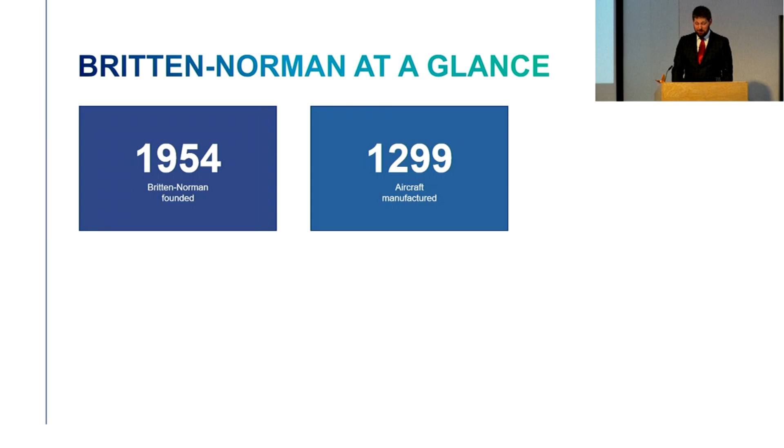But Britten-Norman - do you know Britten-Norman? Well, we've been around since 1954 in various guises. It was founded by Messrs. Britten and Norman, and although I haven't spotted him this evening, we do actually have a Norman, Ash Norman, in the company. There he is, I'm embarrassing him. So the family name is still involved in the company, and we're proud of that fact. The total number of aircraft we believe to be over 1,000, which compares favourably with some very popular, famous, larger Airbus family aircraft - some of them are of that order of magnitude numbers as well. So a real British success story. We're currently at 110 employees in skilled roles, but the company is also expanding, so that number will go up very shortly.

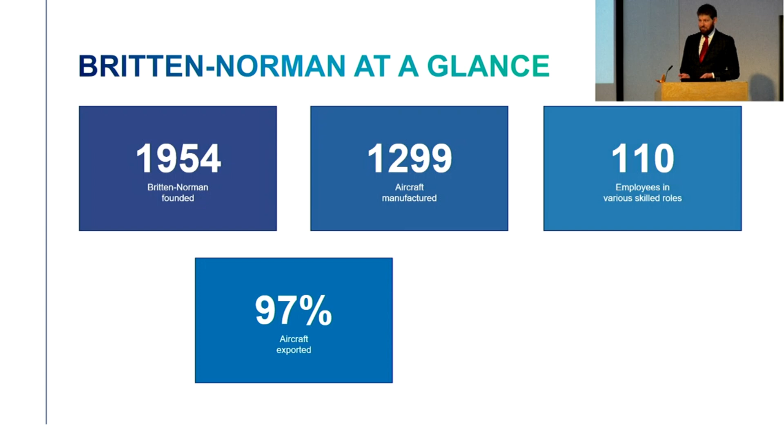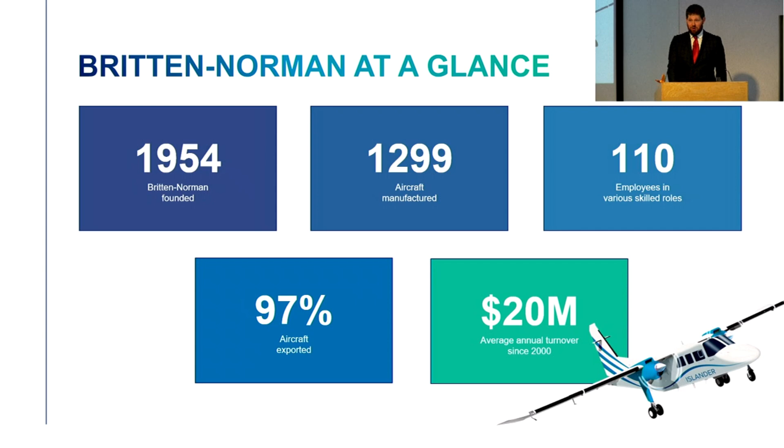Unusually for British industry, we build things in the UK and export them to the world. 97% historically of all aircraft that we've built have been exported, and annual turnover of about 20 million US, which puts us very firmly in small, medium enterprise, SME territory.

I won't go into huge detail of all of these things, but just to show you that for that quite small number of people I mentioned on the previous slide, we do a heck of a lot. So we are a CAA Part 21J design organisation, the type certificate holder of the aircraft. We maintain and sustain that, as well as working on product improvements, R&D, and specialised mission projects, which is the flavour of what I'm going to talk about shortly.

We build stuff too. Our facility at Bembridge on the Isle of Wight is the spiritual home of Britten-Norman and is still a modern functioning production facility where production is ramping up currently. I've got some pictures later on of aircraft on the production line in Bembridge. That is really quite exciting and unusual, actually, from my point of view as a graduate of an aerospace engineering program, having worked on large US-based projects such as Chinook or larger multinational programs like Merlin. Suddenly moving to a world where all the bits of metal go into that building in Bembridge and aeroplanes come out the other end - absolutely fantastic and really unusual in 2025.

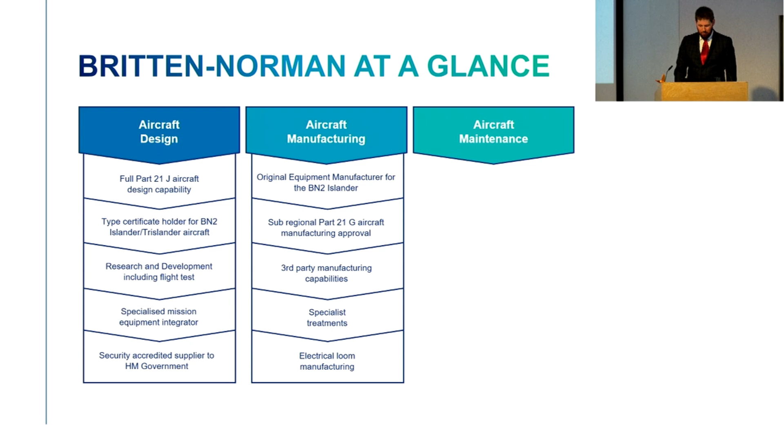We're also a maintenance, repair and overhaul organisation, the MRO, which is Part 145. So another main business line aside from building new aircraft is refurbishing old aircraft that are sourced worldwide. Now obviously lots of people will claim to refurbish an aircraft for you, but when Britten-Norman does it, we really do it. These aircraft are stripped down, nuts and bolts out, and really rebuilt from the ground up, and they come out looking brand new, even for a really very old aircraft.

And finally, we provide what would be called wraparound services - aviation services, so training, continuing airworthiness management, and other services as well.

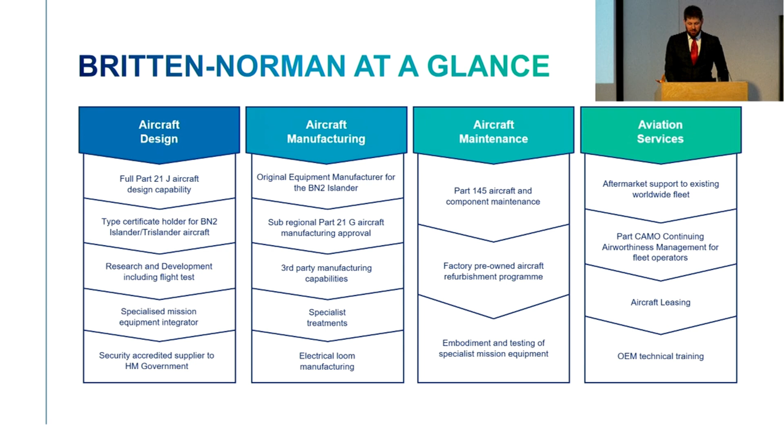So the aircraft itself - some key features here. It's quite often likened to a flying Land Rover, but we are talking a Series 1 Land Rover in some respects, rather than a nice modern Discovery. But those features are really why it's endured so well. It's very simple to construct and maintain in the field. When we compare to our modern, for example, Italian competitors, I ask people to look at the undercarriage. You'll see, as we do some actual photos later in the presentation, the undercarriage on the Islander does not mess about. It is two huge great tyres on a huge great tube that's bolted into the wing spar in a straight line. If you look at competitor aircraft, nice sleek Italian design, nice sleek Italian wheel - try landing that on a ploughed field or a beach with a little bit of a crosswind component. That sort of design philosophy is repeated throughout the construction of the aircraft, and that's why people love them and operate them to this day.

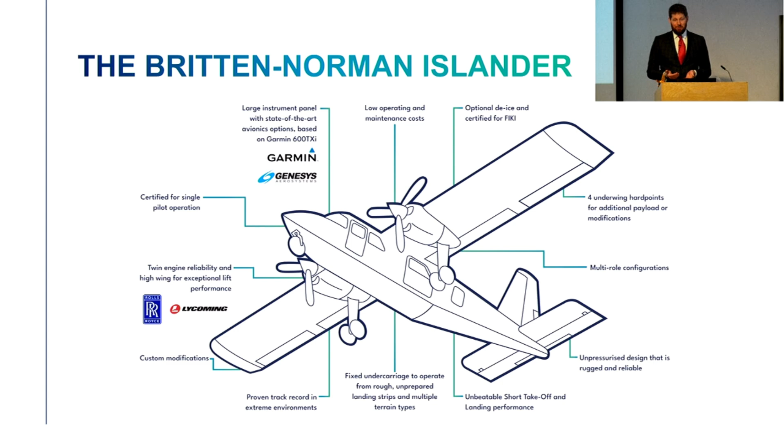Some additional flavours, and I won't dwell too long on this, but fundamentally there are two Islander airframes, and these are all the current production models. There are history lessons to be had about all the hundreds of different permutations over the past 50-odd years. We have the smaller Islander airframe, which comes in two flavours of Lycoming piston engine and a Rolls-Royce turbine engine, and then the larger BN2T-4S aircraft, which has a stretch fuselage, larger wing, much heavier, much more capable, larger turbine engines.

I say larger - when you look at these engines removed from the aircraft, fascinating bit of kit. It's about this size, and it produces 400 horsepower. Absolutely incredible. The first time I saw one, I thought it was a scale model that somebody put out for demonstration purposes. That's why when we look to the future with zero emissions aviation and other cleaner solutions, it's really difficult to beat a turbine on pure numbers, pure power to weight ratio. Fantastic bits of kit.

The typical mission of an islander tends to fall into two main categories. They tend to be commuter, so cram as much stuff in as you can and fly short hops, round robin around a group of islands, for example. That's the service operated in the Highlands and Islands in the UK and also in places like the Falkland Islands. So, a lifeblood, essential taxi service between remote communities.

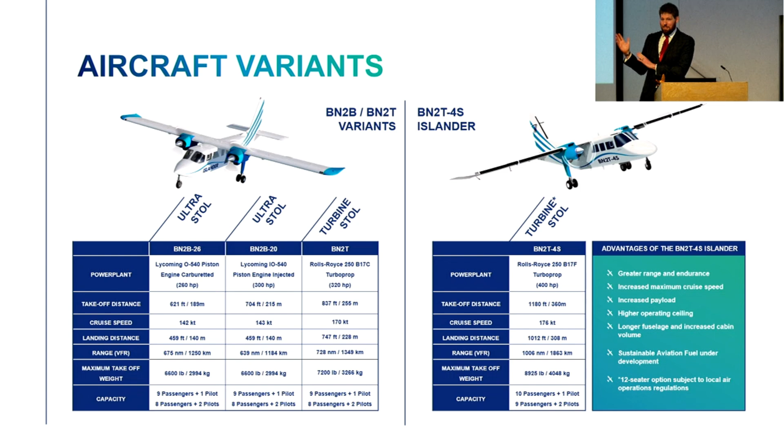The second mission is really quite different, and it's interesting that one airframe can achieve them both: an airborne survey, airborne surveillance, special missions type role, where instead of passengers and cargo, you're taking role equipment - sensors, systems, operators, that sort of thing. The reason the aircraft's good at that is because it can fly very slowly, and quite often it's hard to fly slowly in a fixed-wing airplane, and we do it very well. So a lot of those systems and sensors like flying slowly.

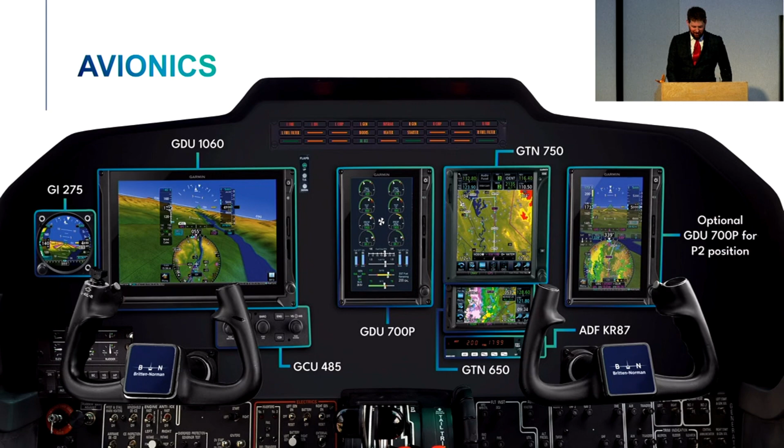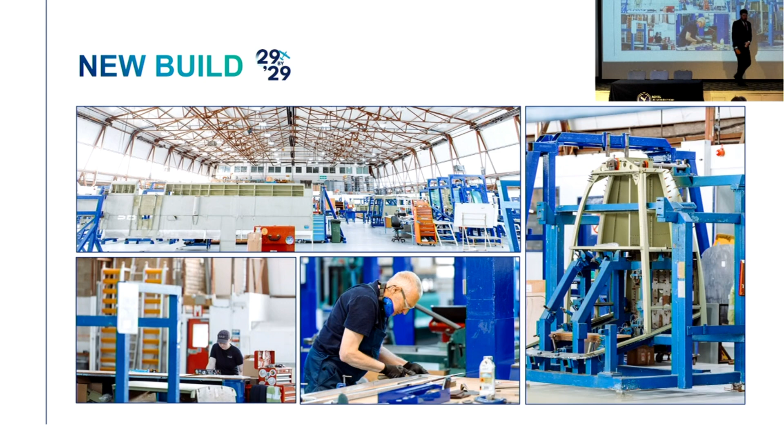29 by 29, the little logo up there - the grand plan is to build 29 new Islanders in Bembridge by 2029. It's a challenge because that production has recently been reshored, repatriated from Eastern Europe, where the aircraft were built for a very long time. So bringing them back to the UK and making it a genuine UK product end-to-end is very challenging. But the will is there, the resources are there, and as you can see, these are photos taken recently. There's the nose assembly of an Islander being put together in the jigs. There's also the tail assembly here. There's a fuselage, and there's some control flying surfaces in the background. So all the bits are coming together, and it will happen.

Project overview - so that was the BN bit. It's now my pleasure to move on to the main event, which is talking about this program that we flight tested last year. So the problem - it's always good to start with an exam question that you're trying to solve with special projects like this.

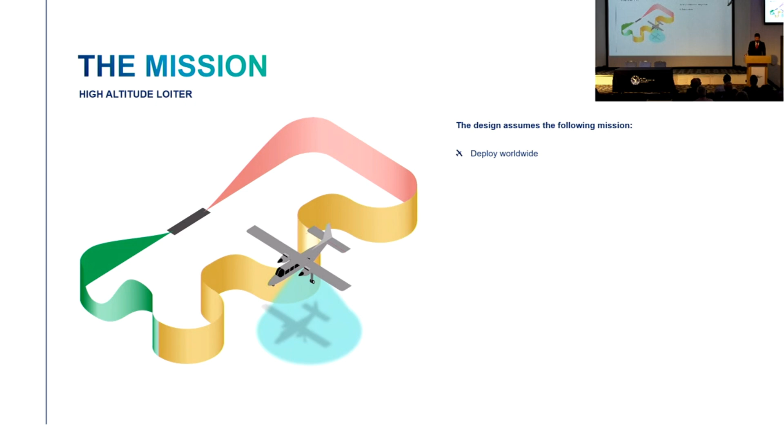So the ability to deploy worldwide at short notice and ferry that to wherever it's needed, to install the equipment in the field, so potentially somewhere quite remote. The actual mission itself: take off, climb to a high altitude, stay there for a very long time, as long as possible, flying slowly. And 8 hours was what we were aiming for.

I've put pseudo-geostationary there. Essentially what the telecoms people would like us to do is be a pole and not move at all. There's lots of different clever ways of achieving that, different racetrack patterns, different cruise climb options. So we talked through a lot of those and we'll develop that with the product in the future.

When running on vapor, fuel-wise, plus a little bit of reserve, descend and land, with a quick turnaround, quick crew change, and repeat.

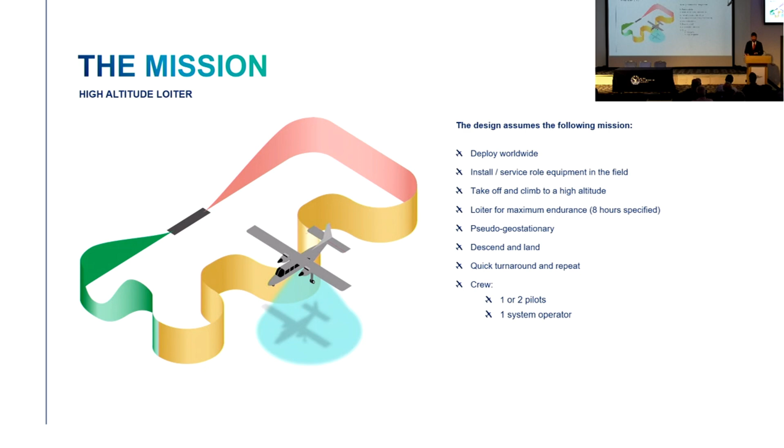Bear in mind that could be a single or dual pilot operation, so potentially single pilot up there for 8 hours, flying slowly in circles, mildly unpleasant. So longer term, potentially an autonomy solution built into it as well, with initially the capability for a systems operator in the back. The reason this is important at this stage of the design is it tells us how many seats you need to have in the aircraft and what interfaces you need to have from each of those seats.

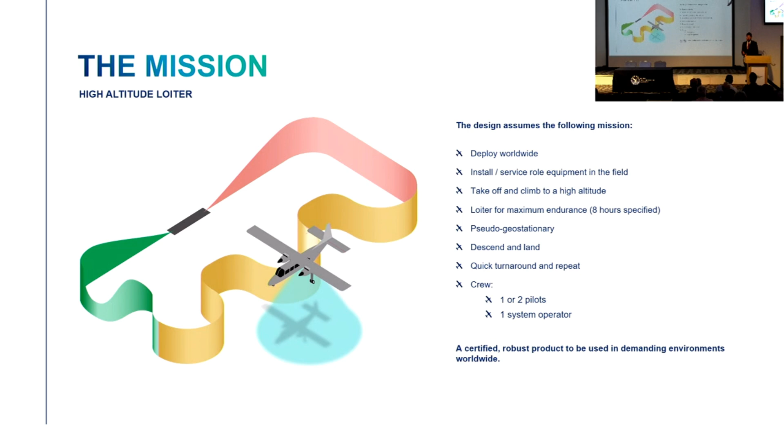And crucially, not a science project, not a one-off flight test article, something that can be flown all over the world, deployed and work day in, day out. So that's what we're aiming for.

The certification strategy for that, and this is Mark Ship's world, our technical director, is to break down the big objective, the big design solution into manageable chunks. So the one that we're mainly talking about today is change number 1.

I've hidden the titles for commercial reasons, but this is what's called a supplemental type certificate. That's just the way it gets approved. And that is a major modification as classified by the UK CAA, to account for the aerodynamic effect of the great big thing stuck on the bottom of the aircraft.

The other 2 changes install the equipment, so actually do the physical installation of that bulge, and the internals that deal with the telecom side of it inside the aircraft. So they were split out into 3 things. The main reason being the major one has a lot more engagement from the regulator because it's a more serious change. That's why they were split out.

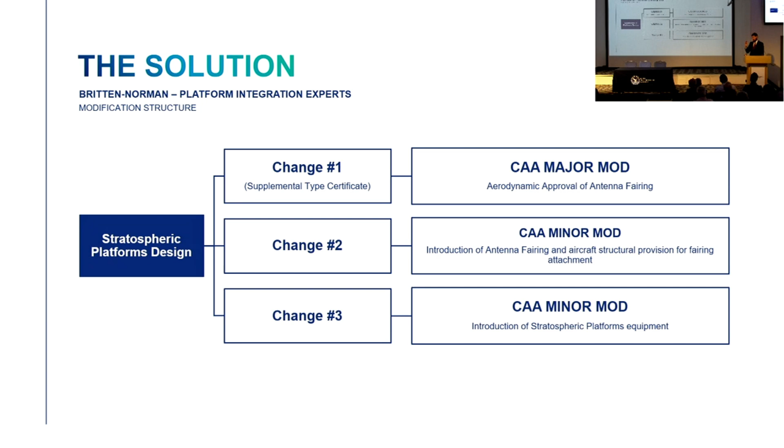So it's not a one-off, quick duct tape it on to the bottom of the aircraft and go flying, although we did look at that, it just wouldn't work. This is a formal engineering solution that's been engineered properly.

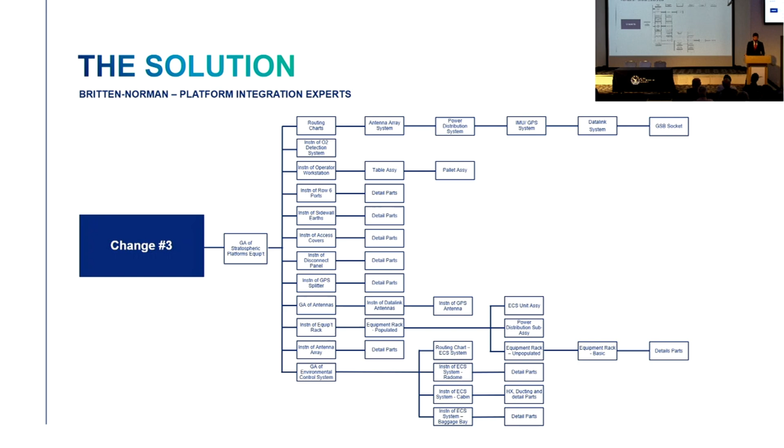Have I got a pointer?

In terms of the shape, we started with the most simple volume that interfaced nicely with existing infrastructure on the aircraft and covered the expansion to the bigger antenna array that was envisaged. We did some subsequent aerodynamic analysis and basically concluded there wasn't much point in making it look pretty. You might see other aircraft, like the Beechcraft King Air, with a more rounded, sophisticated structure underneath, mainly due to the higher speeds involved. With such a low speed aircraft, it didn't really need to be that pretty aerodynamically. At least that was the thinking.

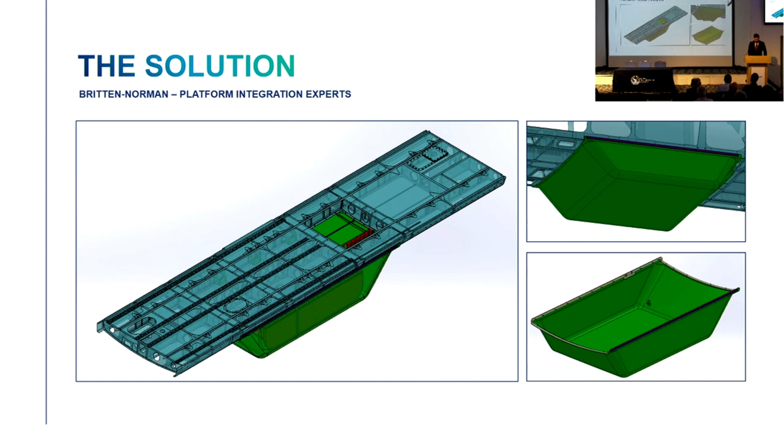Just to give you a flavour of the sort of analysis that happens: structural analysis was done, looking at it across the range of speeds and altitudes, and that's a visualisation of it bowing and deflecting with the change in speed. That essentially proved that an attachment solution was built to keep the thing structurally attached to the aircraft well beyond its highest ever operating speed at sea level, the worst case scenario.

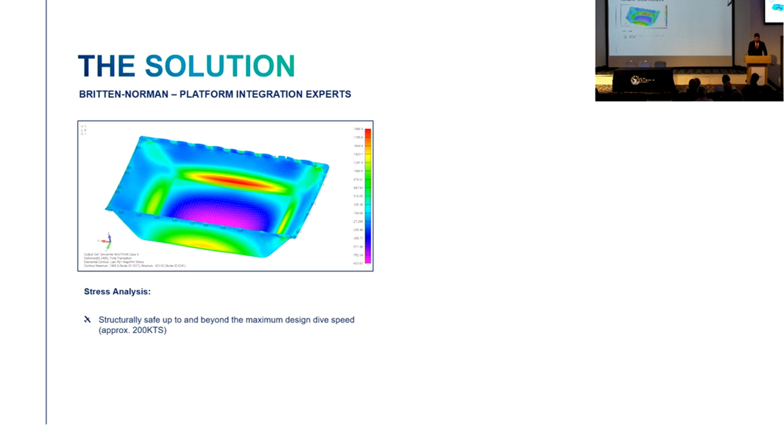We also did some aerodynamic analysis, using a bit of software called Star CCM that looked at the aerodynamics — sort of a virtual wind tunnel, computational fluid dynamics. The things we were looking at were primarily drag, the effect of drag of this large lump on the bottom of the aircraft. You can see it just behind the nose gear there, the wake modelled.

That predicted for us our reduction in OEI climb — one engine inoperative climb performance — of 40 foot per minute. And that's the really critical thing performance-wise on an Islander: what happens when you lose one engine and whether it can keep climbing. So that's the main thing we focused on. Try and remember that number, 40 foot per minute, as we go through.

The other fun thing was the predicted effect on stall speed. Typically, if you introduce a draggy item to an aircraft, you'd expect that to have a detrimental effect on the stall speed, the slowest speed at which the aircraft can fly without falling out of the air. The modelling was actually telling us it would improve the stall speed by 1 knot.

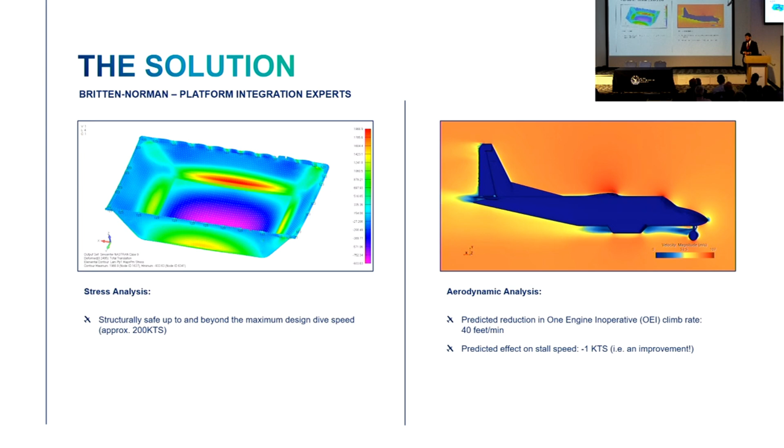Various interesting reasons why that could be true. We thought we'd just follow it through to the flight test program and see.

There's a saying in the design office that if Garnet's looking at drawings, then it's all gone wrong. So I won't linger on this too long because I'm absolutely not a mechanical engineer.

But each of those boxes I flashed up earlier resulted in some very clever detailed design work. I believe this is part of the attachment solution for the bathtub. So yeah, lots of drawings that are initially done in CAD, 3D computer-aided design environments, and are then exported to traditional engineering drawings for production and installation.

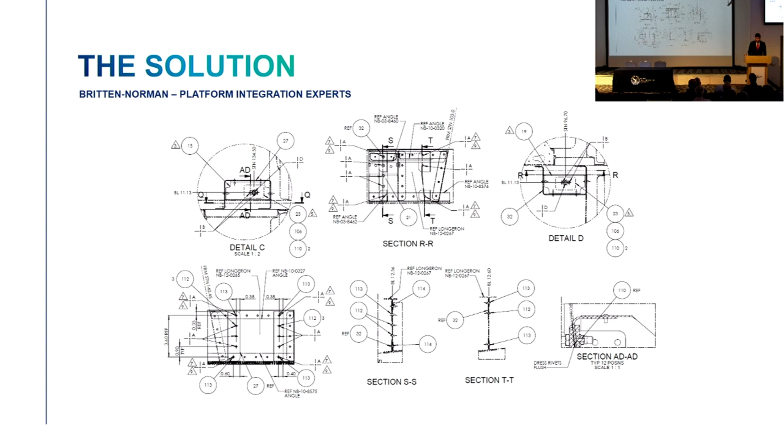And eventually, this is what arrived — well, rather, an unfinished product arrived, and then we applied the finish to it. This is the great big bathtub, the aerodynamic fairing at Lee-on-Solent, ready to be installed. Another interesting fact about it was it was the only one in existence, so we really could not break it as part of this program under tight timescales.

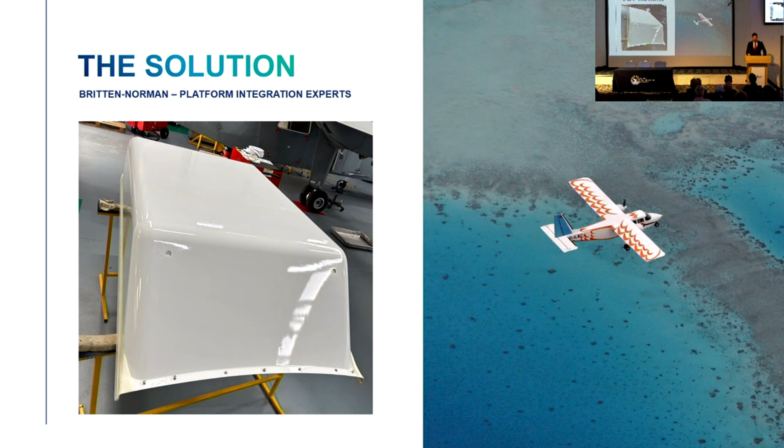This is always good fun.

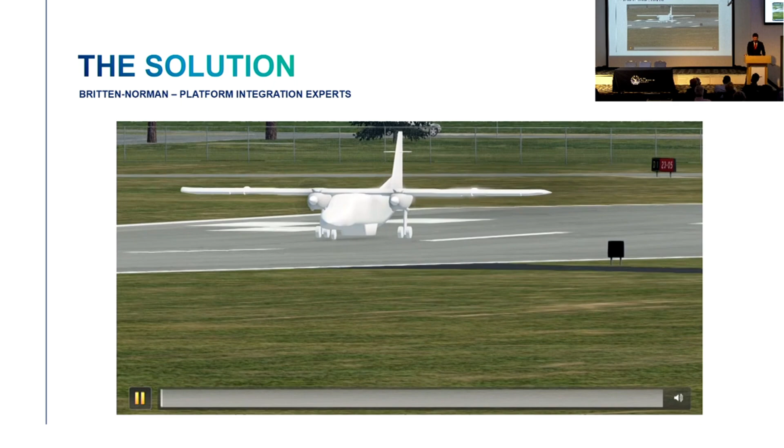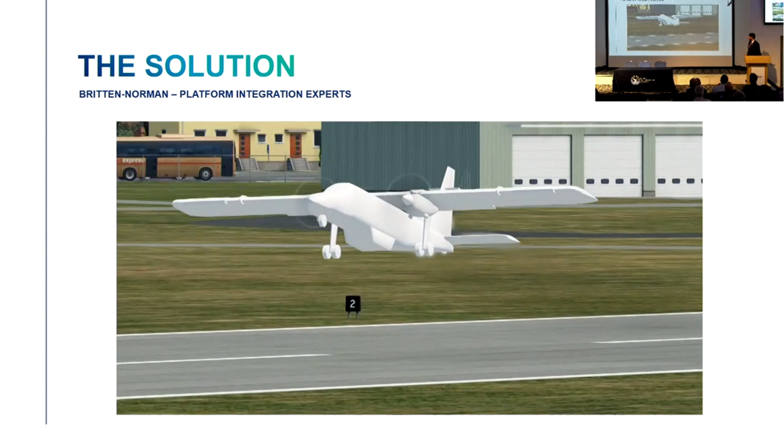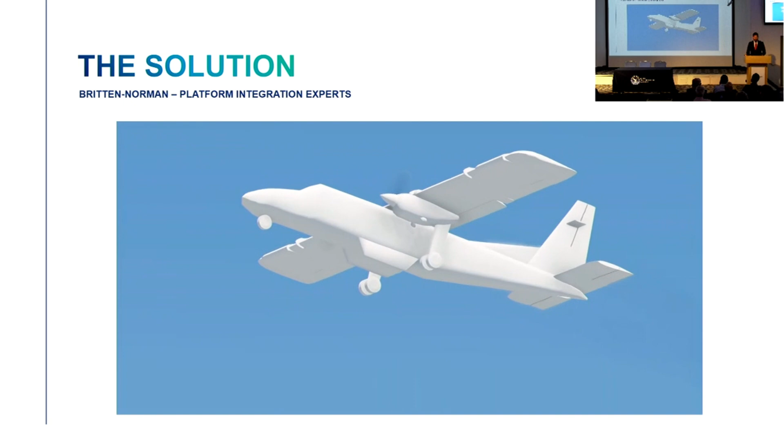So, having got our design solution, done our aerodynamics analysis and structural analysis, we did a limited amount of performance and flying qualities analysis offline, in our desktop-based simulator. This is fundamentally what it should look like: aircraft accelerating along the runway at Solent, rotate, up and away, and you can see the fairing on the bottom there. So in theory, in the sim, all good, and that concluded tentatively that there was very little effect on handling qualities.

Okay, and then it was time to get real. So this is our flight test aircraft. Registration is Papa Oscar, G-BWPO. It's constructor number 4009, and this is a BN2T-4S Islander, the bigger variant I talked about earlier.

Its career: it was built in 1997. It then spent some time in Malaysia, I think as a commuter aircraft, but someone can correct me, before returning home to be a UK military asset. This was the in-country training aircraft for the UK MOD fleet.

At the time, it was going through the refurbishment program I talked about earlier, being rebuilt, and it was a convenient stage in that process to be used as a flight test asset. It's also handily in a clean, lightweight configuration because it never had a big mission equipment fit installed. It was always quite a clean, simple aircraft. So happy days as far as I was concerned.

So what do we actually need to do as part of the flight test program? Where do you start? The aircraft is certified in accordance with a thing called the type certificate, which lives on the CAA website, is held by us and is owned by the CAA. That's a bit of paper that says, this is an Islander, you may go flying in it, you may fly above people's heads, and we don't think it will fall out of the sky. Contained on that document is the type certification basis.

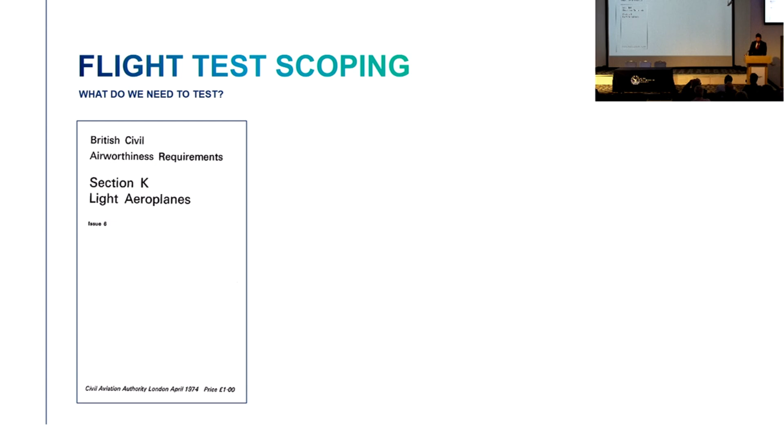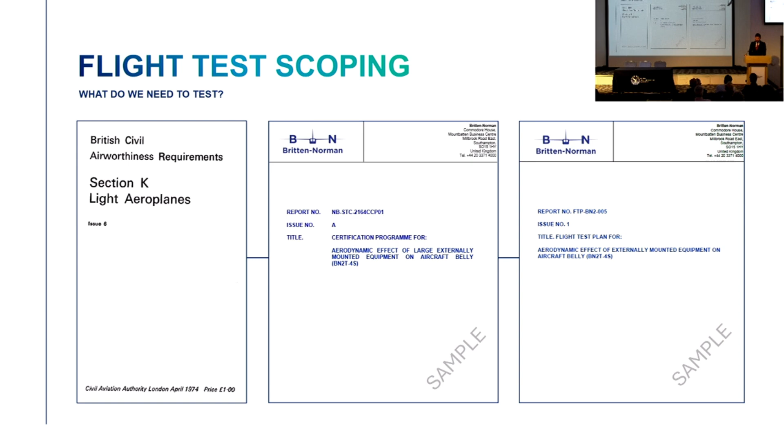So that's that on a slightly smaller level. Our aircraft happens to be certified in accordance with the British Civil Airworthiness Requirements, published in 1974, which can be purchased for the price of £1. We then take that and put it into a BN document called the CERT program, and then into the flight test program. So everything we see from now on, the fun stuff, fell out of this document, which links back to the type certificate.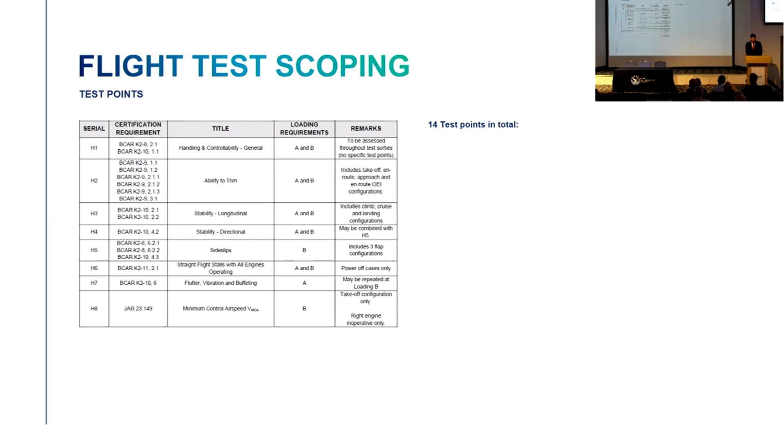I flashed up an example here - these are the handling qualities related test points. You see the certification requirements listed there from the CAA, what they are, what load we have to fly the aircraft at to get the worst case scenario, plus some other remarks. It resulted in 14 test points total: 8 handling and 4 performance related, plus a couple with no associated cert requirements but useful data to gather, like mission profile development and other data we needed.

Finally, these aren't just in any old order. We do things in a very cautious, progressive approach, checking that the aircraft handles and behaves sensibly before pushing the envelope and expanding to more ambitious maneuvers.

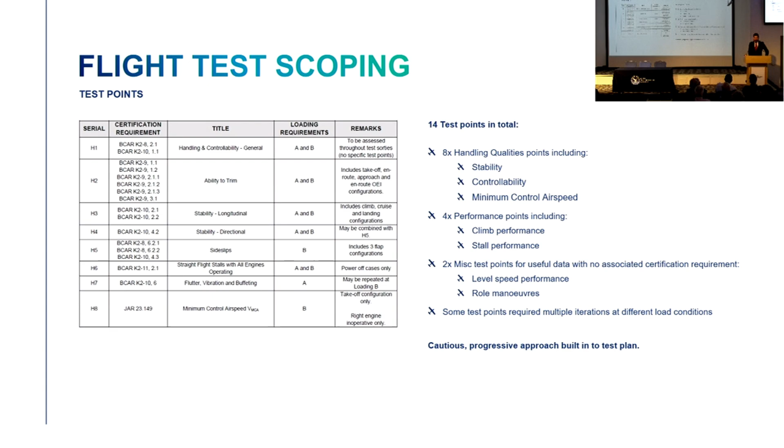So the scene was getting there. All that paperwork was ticking along in the background. In the meantime, the flight test aircraft was being prepared. So I'm going to play this video - it might be the loudest thing ever, but we'll see.

So off she goes. Thank you.

This is the aircraft departing after being in storage for a long time, so it was de-preserved. It had its scheduled maintenance done, and it was sent off for an engine run and a compass swing, which is a procedure for checking the instruments are still aligned correctly with north as required.

One of the joys of the Islander family is they're such simple aircraft that you can achieve an awful lot without flying them. You can get a lot of confidence the aircraft will do what you want without leaving the ground - things like will the engines spool up to full power, do the brakes work, do the flying controls all move as expected. All of that can be done on the ground. So that's what we did, put this aircraft through its paces on the ground first.

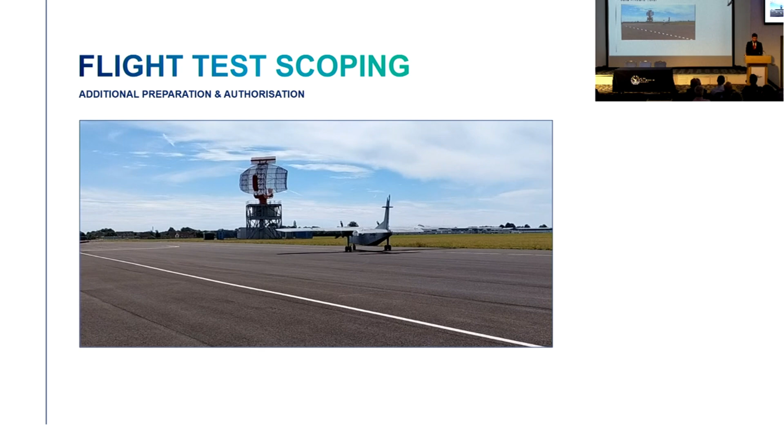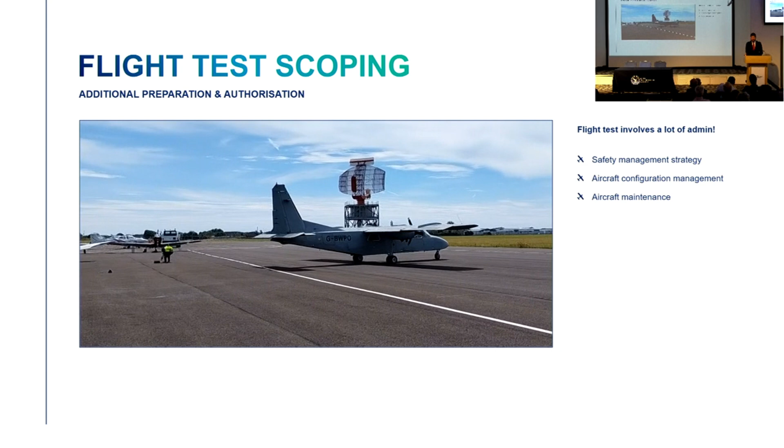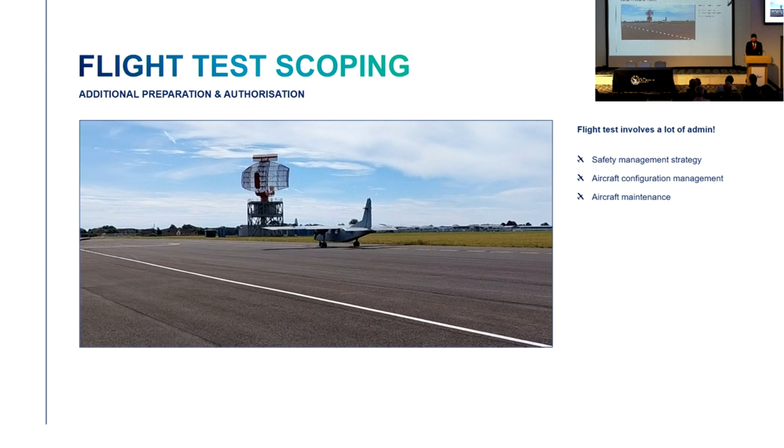Other things we had to think about: safety management strategy. I've briefly said cautious and progressive approach, but there was a lot more to it than that, and that's dull so we won't go into it today. We had a full Part 21J compliant safety management structure in place, and a lot of effort was put in to get the aircraft clear of maintenance, so we didn't have to worry about any scheduled maintenance throughout the flight test program.

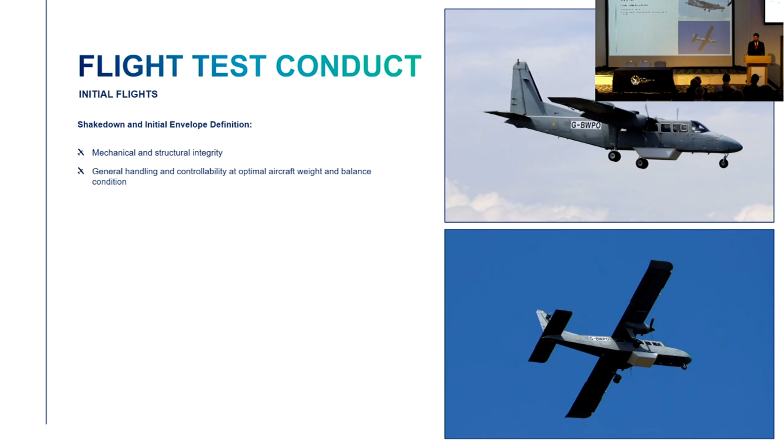Yes, let's go flying. So we did that shakedown flight to prove its mechanical and structural integrity, and also just the feel of the aircraft as an almost informal performance and handling qualities assessment.

So we proved that it could take off and conduct its initial climb. We did depart the circuit and do some stalls just to prove these really critical flight safety parameters, and check that you could trim and fly safely with the flaps down.

This meant we had a known envelope, a range of speeds, heights, and flap conditions that we knew were safe. So if we discovered anything untoward later in the program, we knew we could revert to that safe envelope and get safely back to Lee-on-Solent.

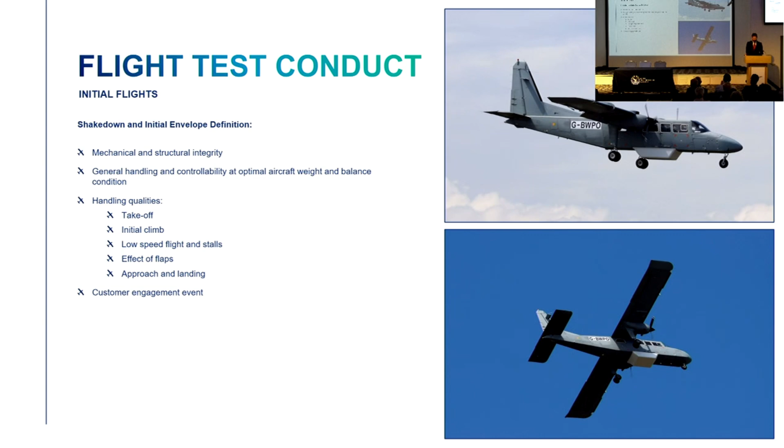We also had our customers and industry partners on site, so we did a brief fly past to show off the aircraft in that configuration, which was actually really good fun and it worked very well. So initial findings satisfactory.

We then moved on to latter stages of the flight test program, so envelope expansion. This is an example of a test card - BN calls them flight test instructions - but this is the A4 bit of paper that I have on my leg, on my knee board, when we go flying.

So this one in particular is for minimum control airspeed. Got my aeroplane on a stick out.

There's probably people who can define it more concisely than I can, but fundamentally in a twin-engined aeroplane, if you're flying along happily at max power with both engines and you have a sudden engine failure on one side, it becomes a tug of war between the functioning engine and the rudder and the fin. The engine wants to spin you and make you lose control. The rudder's trying to stop that from happening. The rudder works better at higher speeds, so as you get slower and slower, the engine starts to win. There is a critical speed, the minimum control airspeed, VMCA, at which the rudder cannot sustain controlled flight.

It's the red line on the airspeed indicator on a multi-engined aircraft. It's quite important, this one. In many aircraft, before you hit that minimum control airspeed - the point at which you can't sustain safe flight with an engine failure - the aircraft will stall first. You're going so slowly it just falls out of the sky, so this is irrelevant.

Because the Islander flies so slowly and so superbly at slow speeds, you can encounter VMCA, minimum control airspeed - a really important parameter. Why were we worried about it? Why did we think we needed to prove it for certification processes?

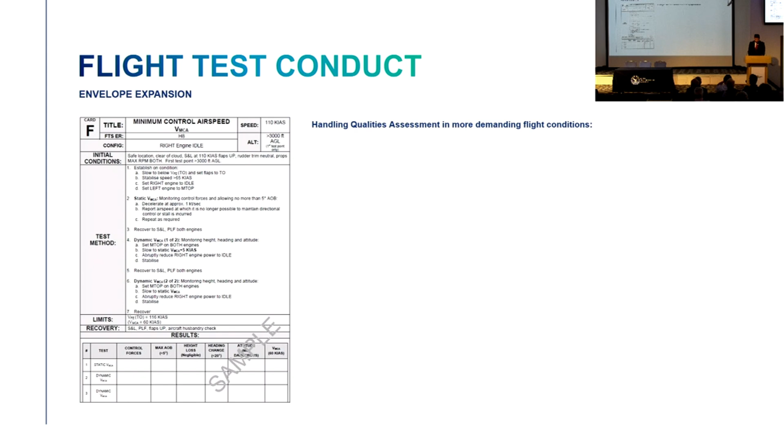We also ballasted the aircraft to achieve either its heaviest weight with its furthest forward center of gravity, CG, or a lightweight aft CG. Those tend to be the two worst case scenarios. Generally, heavyweight forward is bad for performance, and lightweight aft is bad for handling qualities, with some exceptions.

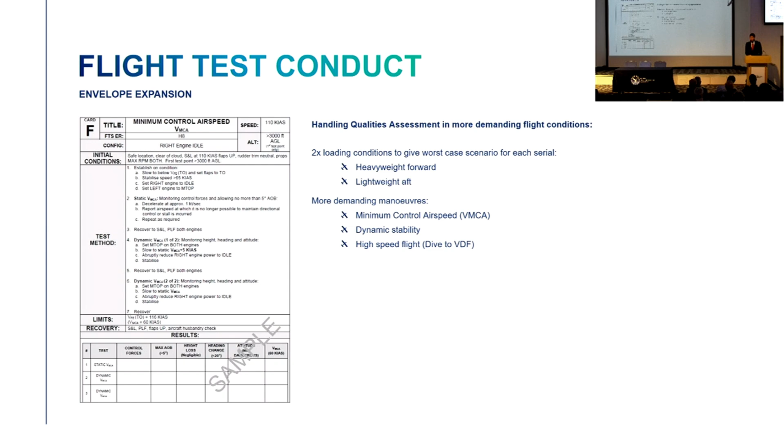So I've talked about minimum control airspeed. We also did dynamic stability, and the plan was to dive to the design dive speed of the aeroplane, which in an Islander is about 208 knots. That's high speed for us, and there's probably people in the room who don't consider that to be high speed. I certainly have flown in faster airplanes, but it can feel exciting at the time.

So noteworthy findings from this handling qualities evaluation: there was an interesting characteristic on takeoff from the lightweight aft configuration, whereby the aircraft was fairly keen to fly by itself with not that much pilot intervention. It wasn't particularly repeatable, and it didn't occur at all load configurations, so a slight unknown.

Fortunately, once you were off the ground at a sensible speed, there was no continued tendency to nose up. It just responded as normal. So the working assumption is it's an interaction between the runway surface and that downward sloping area on the front of the fairing, which is essentially pushing the air down, pushing the nose up.

On the whole, though, you could forget that you had the fairing installed, which, considering how big it is, was quite a pleasant surprise.

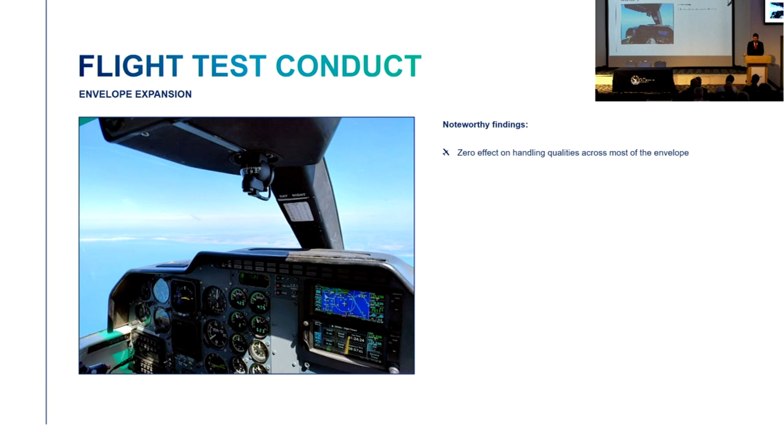Directional axis response: I've put the words mild Dutch roll type characteristics and localized directional sharpness. Dutch roll, for those of you who've heard of it before, can be quite an alarming term, because there were challenges in the industry in the 1950s with airliners breaking up mid-flight because of Dutch roll. Really simply, and apologies to those who already know, it's an interaction between the yaw axis and the roll axis.

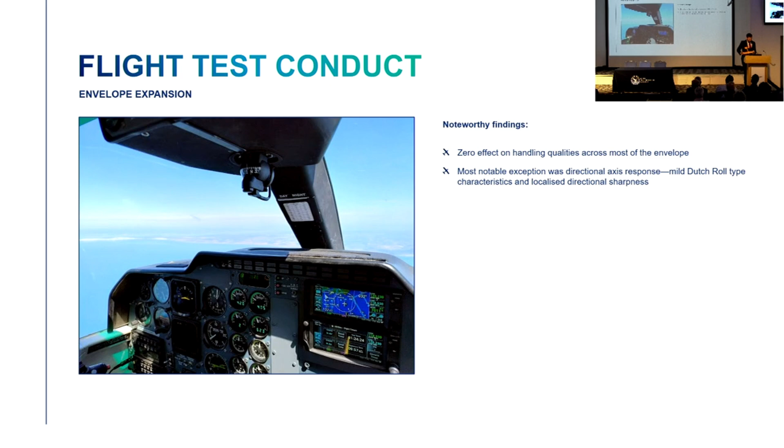If a wing, for any reason, accelerates, it produces a bit more lift. It then has a bit more drag, so it decelerates. That accelerates the other one, up she goes, and you end up lazily rolling your wingtip like this. So that was interesting, and we weren't necessarily expecting it.

I've got a little video of it here. So what we're seeing is the wingtip. When I play it, we'll look at the wingtip tracing its oval in the sky, then pan into GT's hand pressing a button in the cockpit, and we'll see what happens.

So there's that lazy oval - press a button - back out, and it stopped.

That button is the yaw damper, a function of the autopilot that puts in very small rudder inputs to counteract what it sees as a side slip angle. The autopilot on this particular aircraft is not particularly state-of-the-art - it's a simple bit of kit, robust and simple. The fact that it could cancel out that little bit of Dutch roll was quite reassuring - that such simple kit was able to counteract it and eliminate it completely.

Crucially, this only really occurred at speeds beyond the envisaged role of the aircraft, the envisaged mission of the aircraft, and if you did basically anything in terms of speeding up or slowing down, it went away. So an interesting flight test finding, but not of any great consequence for the finished product, which is really pleasing.

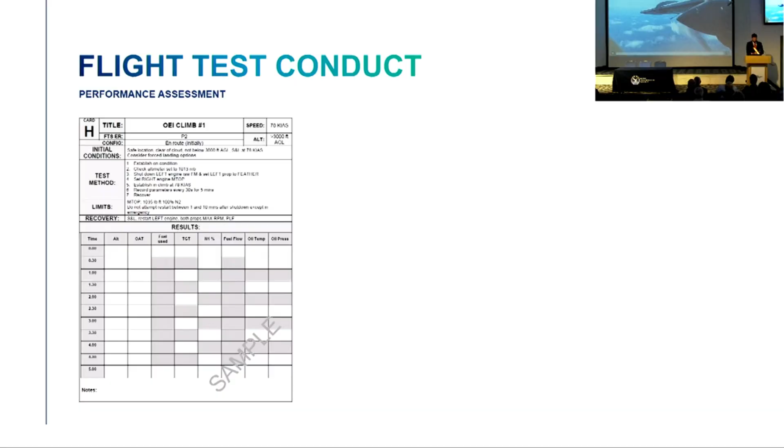So that was the handling quality assessment. As I said, fundamentally not much effect, which is what we want.

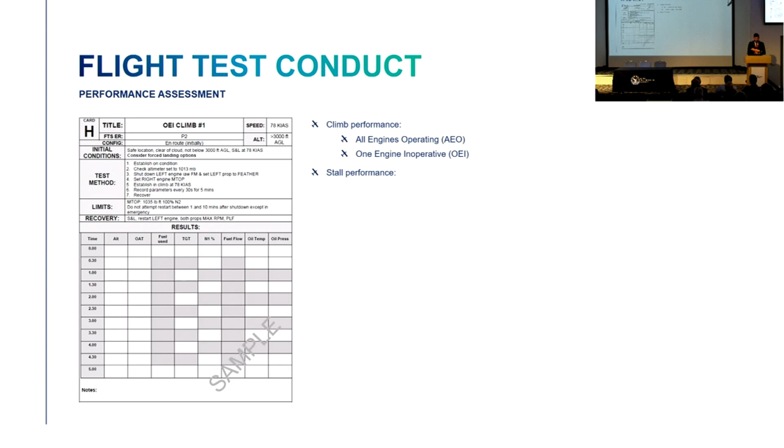Performance-wise, the thing we really focused on here was the single engine climb performance, as mentioned before, OEI, and the stall performance at all flap settings.

This is talking about the OEI climb, so looking out the window at the left engine. In a flight test scenario, this is all very routine and undramatic. I would be perturbed if I saw this while off on holiday on BMI, but in an Islander, engines are close into the fuselage. This was at a sensible power setting - it's almost a non-event, an engine being deliberately shut down in flight.

So we did that - we shut down an engine and flew around perfectly happily south of the Isle of Wight for a couple of hours doing climbs.

I'll do the climb forward first. The simulation predicted we'd get a 40 foot per minute decrement to single engine climb, and what we actually ended up with for single engine climb was minus 29 foot per minute. So we were slightly better than the simulation, which was pleasing.

Interestingly, for climb with both engines operating, we ended up with a plus 13 foot per minute increase in twin engine climb performance. I'm tempted to say that was experimental variability, or engines being run in, within the normal tolerance of business, because the rate of climb is potentially up to 1600 foot per minute in that scenario, so plus or minus 13 isn't that big a deal.

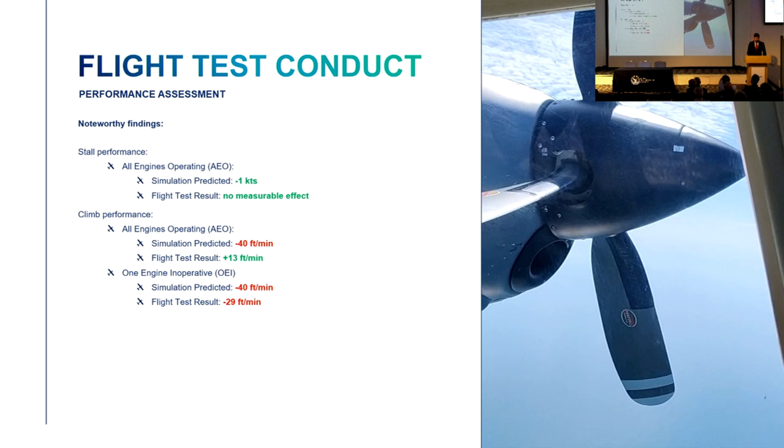So to wrap up, we completed the program successfully, which was 5 flights, but really quite long ones for us anyway - 8 hours 40 airborne, all flown by GT and myself, plus we had a cameo appearance from one of our design office interns who's since gone off to join the RAF. It was pleasing to get young people involved in the program.

We had no safety concerns throughout the flight test campaign, which is always very important for us. And those 3 characteristics that we identified, we thought it would be prudent to include in the document you get when you buy the certified product.

That slight reduction in single engine climb performance needs to be factored in for flight planning and weight and balance purposes. And that note about potential nose lightness on takeoff.

I won't linger on the certification bit too long because it's not very interesting, but it is important. So how do we get from scribbles on my test cards, flight test data, to a certified product? GT and I publish post-flight reports, which are our raw data that then get distilled into a very presentable and professional flight test report that forms a formal part of the certification process.

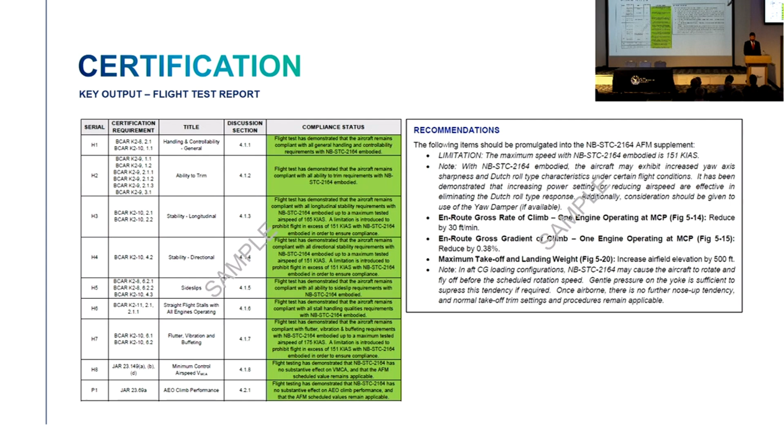And that's a little excerpt from the flight manual supplement - this is, as a pilot, what you'll get if you buy the product and fly the aircraft to this. Essentially, a limitation saying the speed is limited to 151 knots, some notes useful for piloting strategy and awareness, and some performance figures from that single engine climb decrement. That's the supplement as it looks, an addition to the flight manual of the aircraft if you have this thing installed.

And that's the prize at the end, a document issued by the UK CAA, the supplemental type certificate. This is ours, and you can see the title at the bottom - aerodynamic effect of large externally mounted equipment on the aircraft belly. Worth pointing out, this wasn't actually tied specifically to this program - an object of that shape and size is now available to install on all BN2T-4S aircraft for whatever reason it might be required in the future.

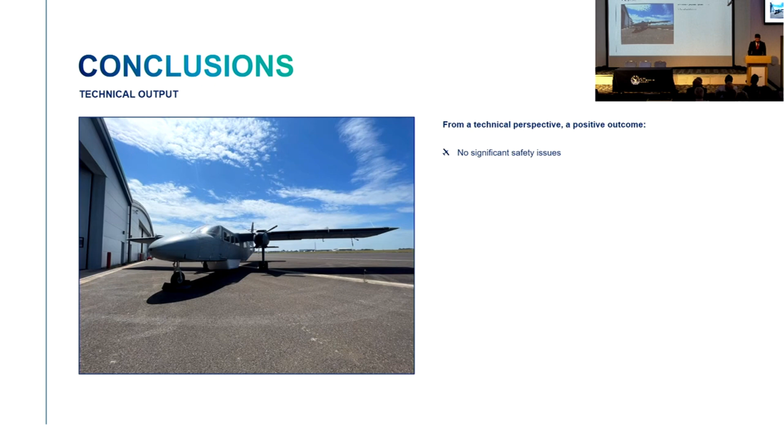Okay, it's time to wrap up. As discussed, from a technical perspective, it was a positive outcome because we satisfied all the cert requirements and achieved a major design change, which is the same process that huge multinational aviation organisations go through. There's probably more people in the catering department for those programmes than there are in the whole of Britten-Norman, yet we still achieved it, which is quite a satisfying thing to do.

The real-world data correlated pretty well with the simulated outcomes, and our simulation facilities are simple, basic, and appropriate for the type of aircraft - a very conventionally configured aircraft, low speed, low altitude. It's quite satisfying that we can take those products and get real meaningful data out of them.

And yeah, the important thing, which I think gets drilled into you at the Empire Test Pilot School, is that the solution is not just safe, but also fit for its role. You could happily fly this around at 25,000 feet slowly for 8 hours if you really wanted to.

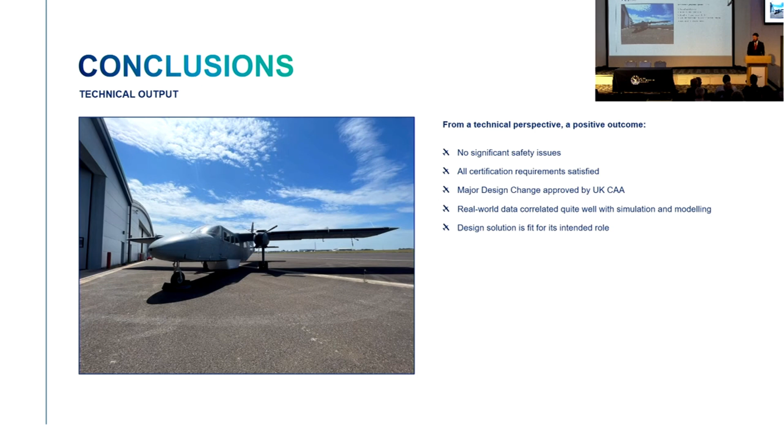So that was the sort of technical outcome. From a personal level, some things that were quite satisfying.

It was actually a proper flight test. A lot of my flight test activity in career previously had been what I'd term verification activities, things where you really knew what was going to happen, you just had to prove that it really would happen in reality. Whereas this was a totally unknown configuration of aircraft with this new aerodynamic configuration on the bottom that nobody had ever flown before in that configuration. That was quite satisfying. I know GT probably wasn't as excited as I was, but yeah.

And it was a big aerodynamic change. People can be quite blasé about the Islander and installing equipment onto the outside of it because it's such a tolerant, robust airframe. There's a sort of, oh, it doesn't matter, it won't have any effect. But this thing was enormous. And it was good to challenge the platform and to prove that there is actually a point where you do start having an effect on it. I think we were just perfectly on that boundary with this product.

And yeah, there was enough interesting technical content in the flight test program to make it engaging and make it interesting and fun, but without anything that required a big redesign or anything else that would have caused it to be commercially unsuccessful. And the program touched every part of BN. We designed and manufactured, installed, and flew this bit of kit, which is quite satisfying.

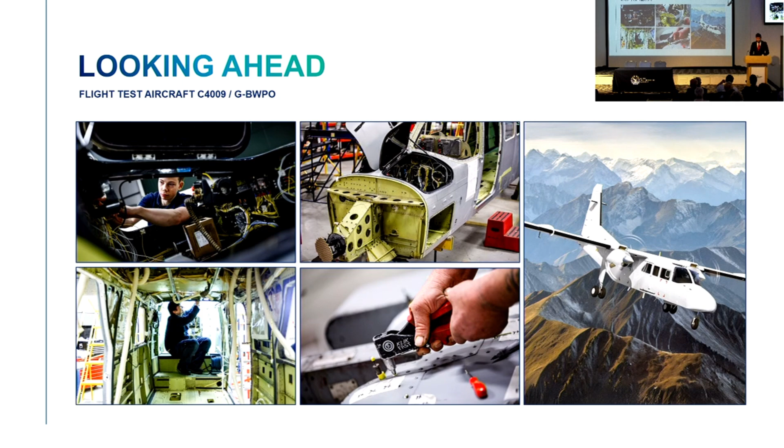The program itself, so the project StratoMast, stratospheric calibration, the project won the prestigious award from The Engineer. So it was the information, data, and connectivity winner for 2024. It's an award-winning program that is pursuing lots of different opportunities for deploying it in different scenarios, so disaster zones, construction sites, lots of other ones as well.

Important to note as well, we didn't just build a one-off that would only fit on 4009 flight test aircraft. It was designed to be role changeable for other BN2T-4S aircraft, so it can potentially be installed on any of those in the future as required.

And finally, Britten-Norman. We're a modern British aerospace engineering small-medium enterprise company. I have to put the comma in there to make it clear we are not British Aerospace.

There's a significant focus on new build production at the moment - that's the primary focus of the company right now. We're also sustaining our special products capability to run similar programs in the future, because that's really exciting and a good use of the expertise within the company.

Because the aircraft's been in service such a long time, there's some challenges with obsolescence. The aircraft was born into an ecosystem where there was a huge aerospace industry in the south of England building aircraft from scratch, where you could choose whatever you wanted from a catalogue and it would arrive the next day. We don't live in that industry anymore - we're a bit of an outlier, really. So sourcing key components to keep the aircraft flying cost effectively is a huge challenge, and that's one of the things we're spending a lot of time on.